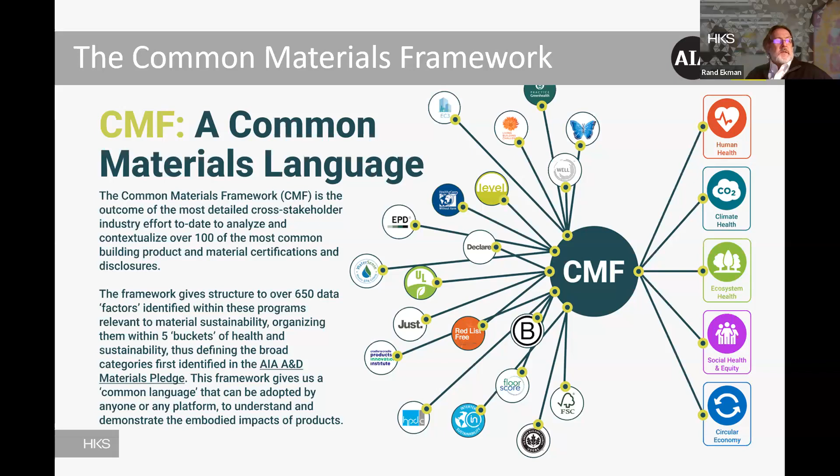All of that information is intended to go through the framework, which is the Common Materials Framework, and then to give actionable information on the five buckets that I've described previously.

We've attached ourselves to a whole host of different organizations. It's really trying to reach around the many different corners and places that our industry has, and position Mindful Materials as a collaboration hub for this information. It's a key part of the organization's work right now.

Again, it's one of the reasons why I want to introduce this on this call, so that you all know that it's there and would potentially take a little time to go out and check out the material, because I think it's going to enable you to do better work in a more actionable way.

The five buckets have subcategories within each bucket. I'm not going to get into the depth of this, but this is the organizing structure for much of the information that is being created in the common language.

And this is the next layer of depth, showing the human health top bucket. There's a host of different issues that get resolved or revealed in the data. In human health, it's substances, VOCs, and then the organization, the company, how it is that the company is addressing human health impacts.

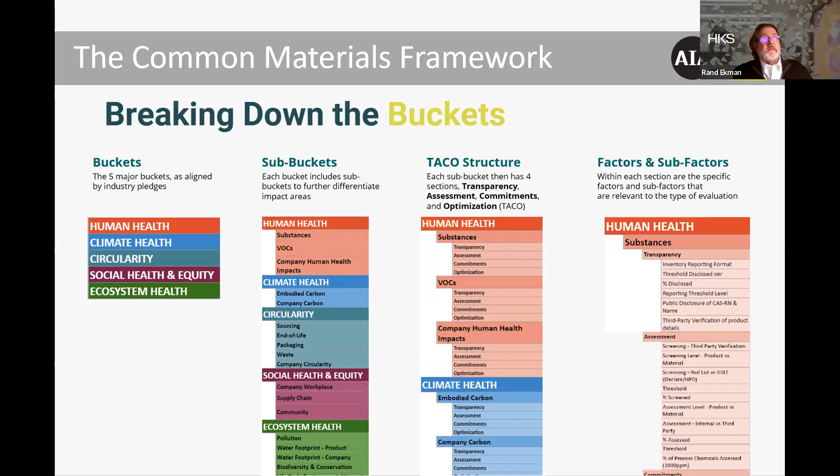Those are focused in on another level of detail, which is around transparency, assessment, commitments, and optimization. And then there's data that flows from that is even more refined around factors and subfactors - what is the actual accomplishment or optimization status of that particular material or product?

So that was hopefully an intro that whet your appetite to go and spend a little time there. I'm going to focus this next piece of slides on a particular project around circular economy, which is why we're here. This is the statement in the pledge to support a circular economy by reusing buildings and materials and by designing for material efficiency, long life, and perpetual cycling.

So this is a project that HKS did a few years ago.

This is the ProMedica headquarters. It's an adaptive reuse of two buildings: one a historic Daniel Burnham designed steam plant with chimneys, and a brutalist, maybe less remarkable, junction building. Both were sited on a park at the Maumee River at the heart of Toledo, Ohio.

This healthcare institute is a not-for-profit with a mission to improve community health and well-being. The design for the headquarters aimed to transform the downtown and reuse the existing buildings. We did a life cycle assessment to understand the delta between building new and reuse, and fortunately had the opportunity to really dig into the reuse for this project.

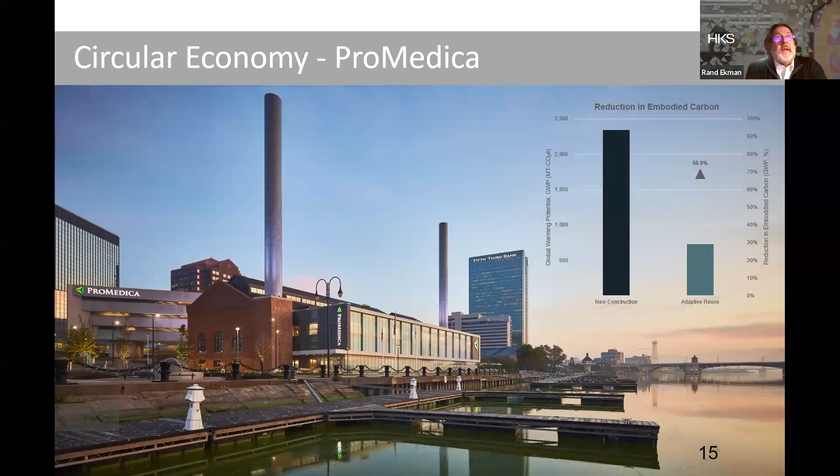One of the things about circular economy is making spaces and places that last, that have longevity. This space has both an interior and exterior function—there's a park with lots of events that has created a vibrant economic place for the community. The urban renewal has affected transit patterns as well as the core economy of that part of the city, and as I said, there was a 70% reduction in the embodied carbon footprint.

That's a project example I wanted to share—I'm particularly proud of that. We don't always get the ability to really dive deep into a reuse. There's a project where we did, and we need more.

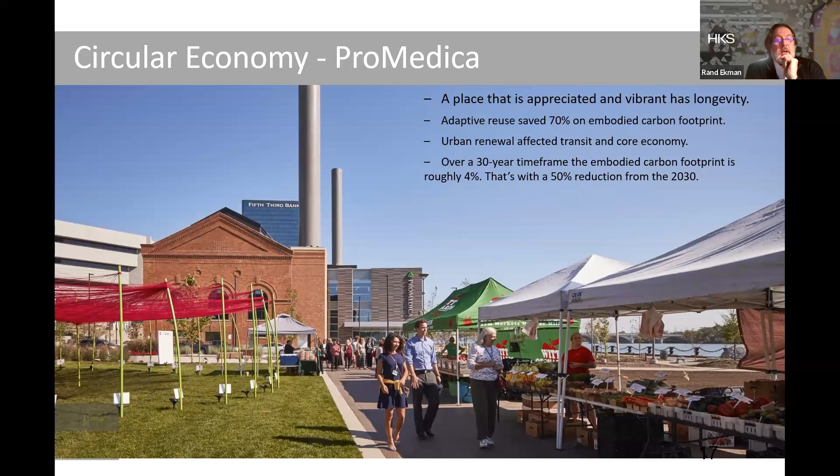Now I'll spend a few minutes talking about what we're focusing on in HKS and how we're framing the notion of circular economy. These graphics and thoughts draw directly from the London plan for guidance on circular economy—if you haven't heard of it, I suggest taking a look. It has useful guiding principles: building in layers, designing out waste, designing for longevity.

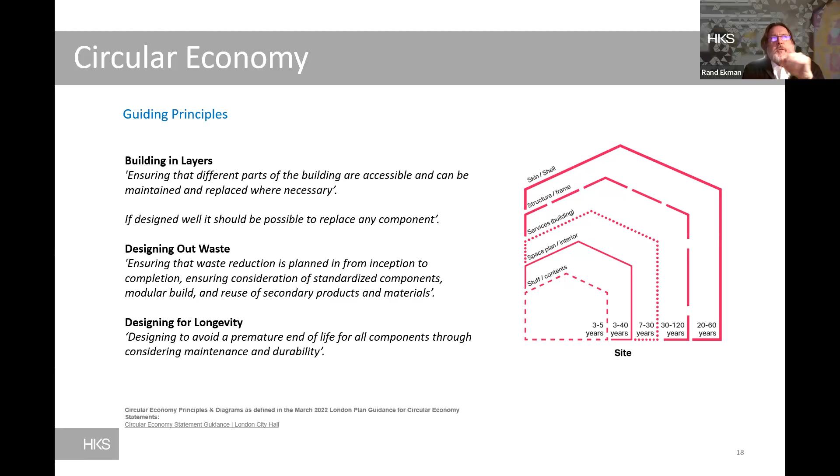I had an interesting experience earlier this week—I was fortunate enough to listen to a presentation by Shigeru Ban. He talked about how buildings he's done that were intended to be temporary are ending up having a very long life, because things considered temporary are being appreciated by users and becoming permanent. That issue of longevity is a really fascinating one.

Designing for adaptability or flexibility, reuse potentially for different program uses, as you saw in the project I just shared—a healthcare office function that was previously a totally different function, a power plant. Designing for disassembly: how we can use more mechanical fastening systems so pieces can be taken apart and reused differently in the future, and using systems, elements, and materials that are easily reused, recycled, and ideally upcycled.

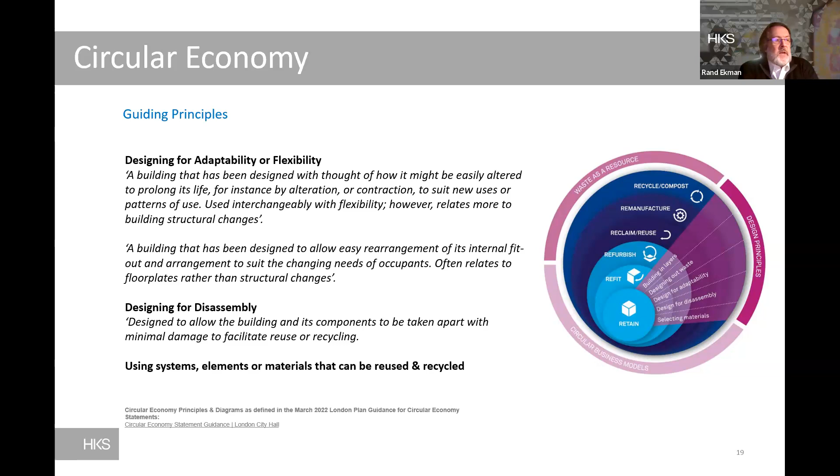I wouldn't do justice to this topic without some editorial thinking. I think this is an area of growth right now with a lot of opportunity, but also some challenges and barriers—we can talk about those at the end. We have information about how to design towards circular economy, but it's not always packaged in a tangible way, and design principles aren't always built into the workflow we'd hope. Specific examples exist, as I've shared, but it's still somewhat of a niche topic—there's a new building mentality that permeates the industry.

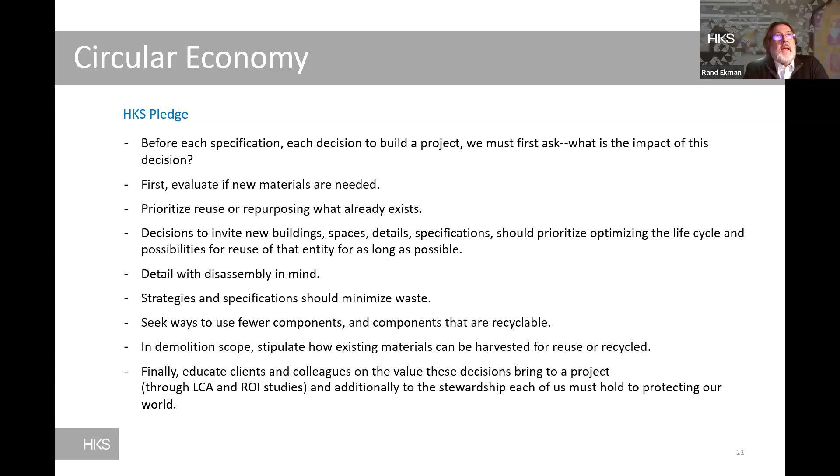And I think that is my last slide. Is that right? Oh, one more.

Big statement: it's time for circularity with purpose and vision. It's going to take work. It's going to take commitment. It's going to take signing on to the pledge that I shared at the beginning of this. I hope this was a bit inspiring, and we'll all go there. Thank you very much. Now we can go to the next slide.

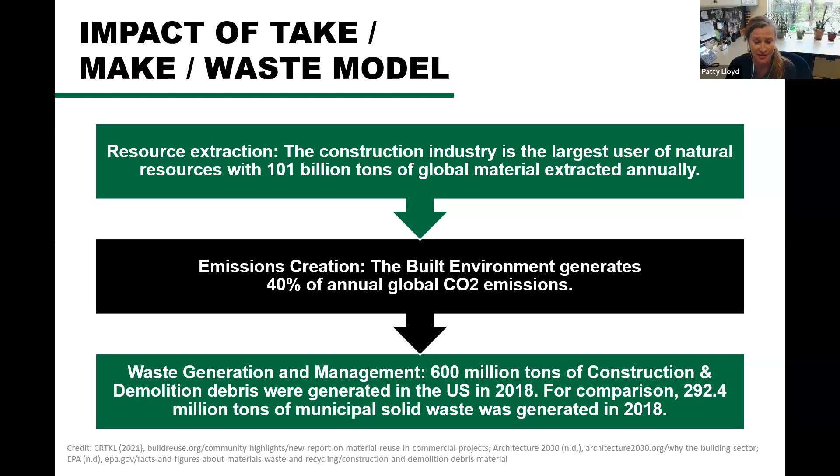So the construction waste stream. An FCRBE study, done in Europe, found that only 1% of building items were reused. There is economic loss and high environmental cost to this.

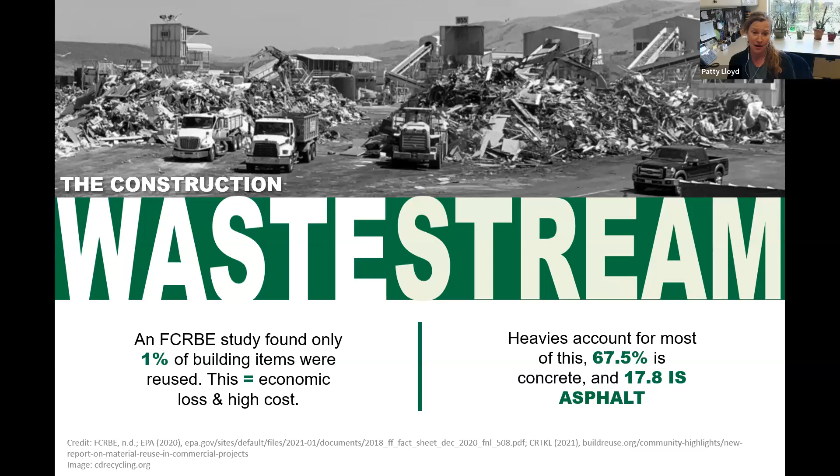Construction growth projections are high as we continue to build to accommodate a growing population. Between now and 2060, across the world, the equivalent of the city of Paris will be built every week. There's also a US comparison with the city of New York. Over the next 40 years, total building stock is estimated to double, and nearly a third of our present building stock is going to come down through that process.

By 2050, we'll consume 3 planets worth of resources. That doesn't seem like a feasible number—we've only got 1 planet. I don't think we can recycle our way out of this. So how can we reuse and salvage existing materials to do that?

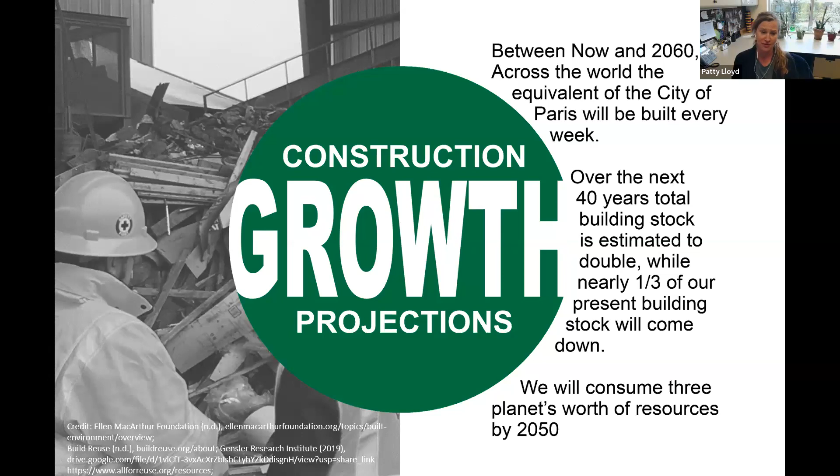So we're really in a linear model right now. We need to go to a circular model—that's why you hear the word circularity. Often when you say circularity, people say to me, 'I recycle.' Well, that's great, it's just not about recycling, right? And you can see a beautiful circular model here at the bottom.

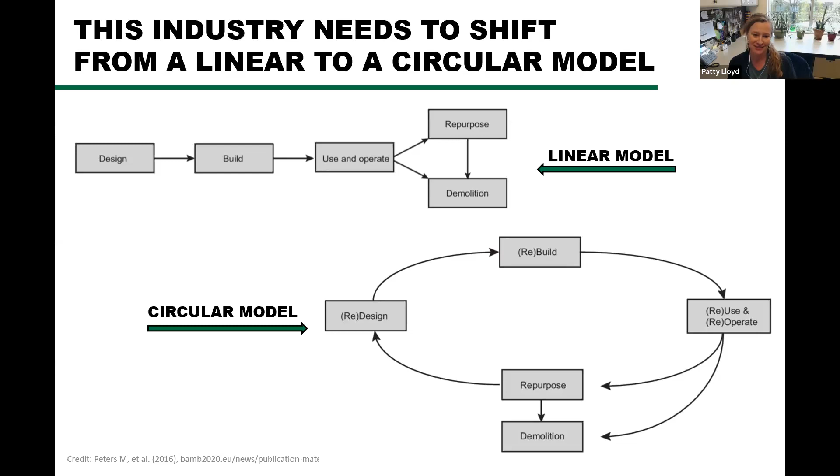So there's triple bottom line opportunity for commercial deconstruction. I'm not going to talk about deconstruction a lot because Ann's really got that covered, but we've got environmental, economic, and social. As someone said to me recently, deconstruction and salvage truly hit all 3 legs of the stool of the triple bottom line.

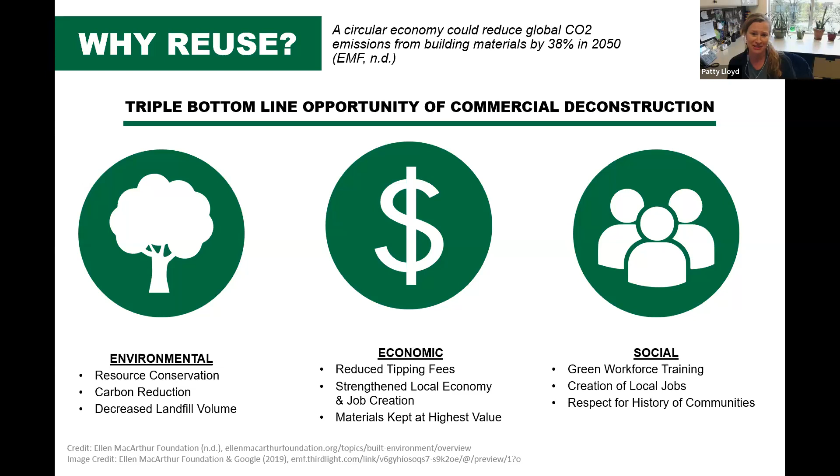This was put together from All for Reuse, which you should check out their website. This slide focuses on the high churn of tenant interior projects—these projects turn over really fast. What that means is you often have a lot of really usable materials going to landfill or recycling that have hardly been used. When a ceiling tile in a commercial interior project gets replaced every 3 years, it's essentially not used, it's brand new. How can you design to keep that in place, or donate it, or put it to a manufacturer take-back program?

This slide really shares some great points: demolition waste from commercial renovations is over 20% of the US construction and demolition waste stream. That's a pretty big number when you're talking not whole buildings, but really interiors.

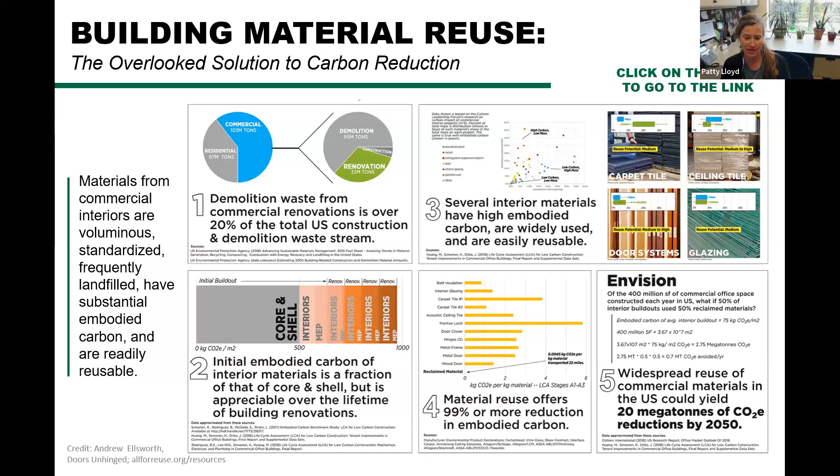Next slide, please. There's a huge opportunity for surplus, really kind of a hidden story of the industry that people don't talk about. This is your attic stock, the extras when you have to order a high volume to get a price break. So it's another feedstock into the materials reuse stream.

It's not the same thing as salvage materials, purchased and never used. There's materials data available, and it's new in box. The San Francisco Department of the Environment did a great study on this that you can access online to find out more, but they had some great findings.

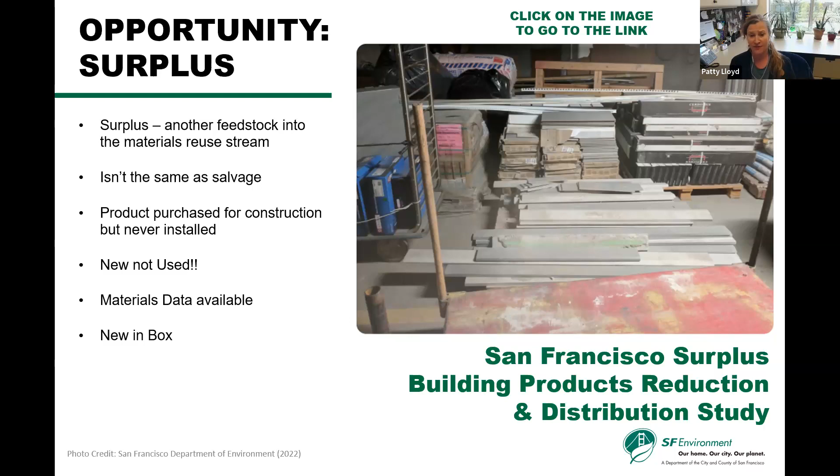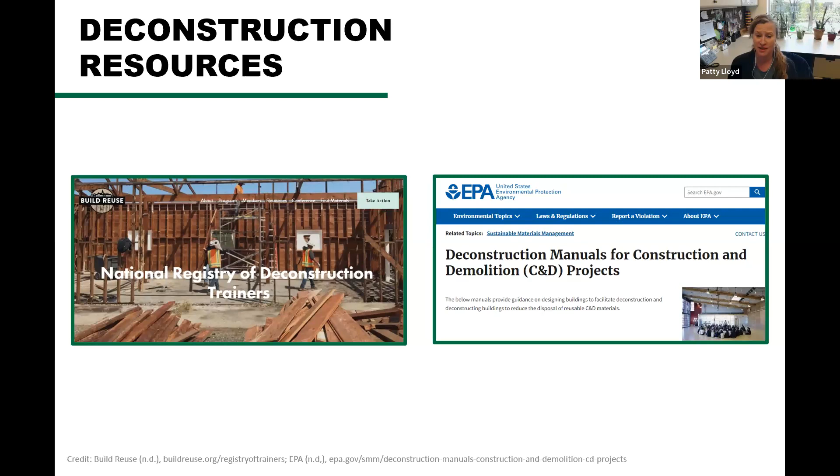Code language is supporting reuse in new construction. Washington State and Oregon have both implemented code language to facilitate the reuse of building materials, and this is a big deal. I believe more and more cities are going to start to pick up language like this.

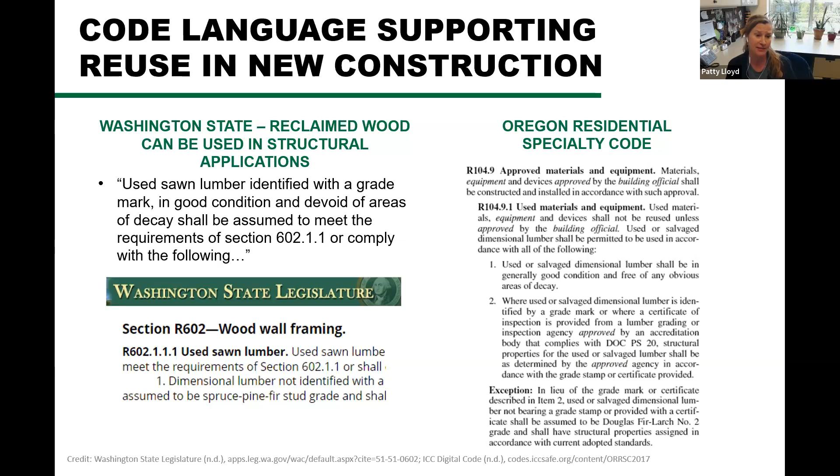Salvage assessments are really, really important. This is something where if it's coming from the design side, or the client's asking for it to be done, that can be really meaningful. You can't manage it if you don't measure it, so if you don't inventory what's in a site, how do you know what to salvage or recover?

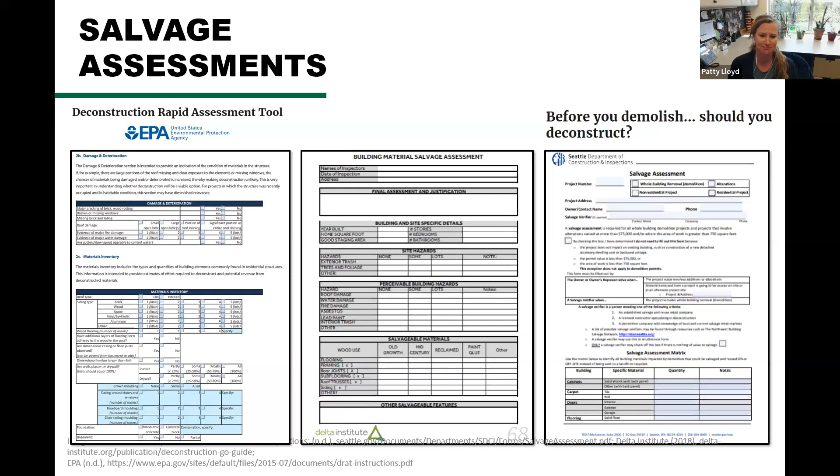Stop Waste has a deconstruction specification that can be used. This is an excellent tool that anybody can download.

Material rescue and reuse epitomizes climate action for the building industry. It honors the embodied carbon and upends the prevailing linear take-make-waste pattern, and that is the truth of it. When you're salvaging, you're respecting those harvested materials, you're respecting all the inputs put in to manufacture it the first time. There are a growing number of cities and states implementing construction and demolition debris laws, in addition to deconstruction ordinances.

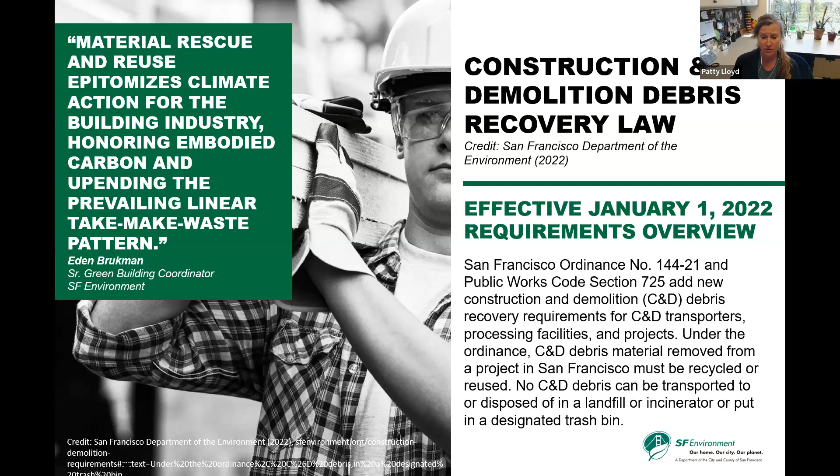Next slide, please. Yeah, I thought I had a slide about deconstruction ordinances. More and more cities are having deconstruction ordinances, and this is a great way they're achieving their climate action plans or coming to their zero goals.

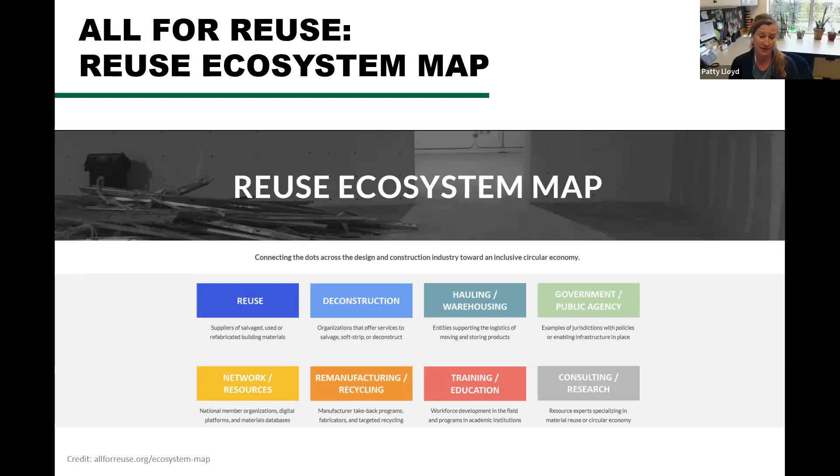The All for Reuse website has a reuse ecosystem map. You can go in and it's directed by state, and there's a lot of different things you can search for to try to find resources in your area. I thought I knew what was going on in our area, and I actually found a couple things I was not aware of. So it's a great resource to check.

Next slide, please. There's a lot of material exchange platforms coming out. We need them all, we need all of these different niches in this space to move materials. One of the biggest issues, and I think Rand alluded to this, is the logistics. Like, okay, if Rand specifies some reused materials, it's quite some time before us as the contractor get that. What happens to those materials in the interim?

Who stores them? Where do they go? Furthermore, when we're pulling materials off of jobs, how are we moving them? I go to Anne's organization quite a bit, but these materials exchanges are becoming an extremely powerful tool to facilitate materials exchange.

So there's challenges. Schedules and contracts don't value deconstruction and reuse, and they don't reflect the added time or labor that needs to happen sometimes. There's not enough stability to make sure the materials are there when needed. You've got to have some out of the box thinking. If you're specifying materials before the contractor is hired, maybe the owner gets those materials and stores them somewhere. I don't know, but these are things we need to be thinking about.

There's inundation of certain commodities, commercial deconstruction and salvage and reuse is talking in large quantities. And most of the places that are out there that are reuse stores don't have the storage space to handle that. So how do we move that? Cheap landfill costs in parts of the country. Somebody said to me, but don't you save money on tipping fees? Not when the landfill costs are super cheap.

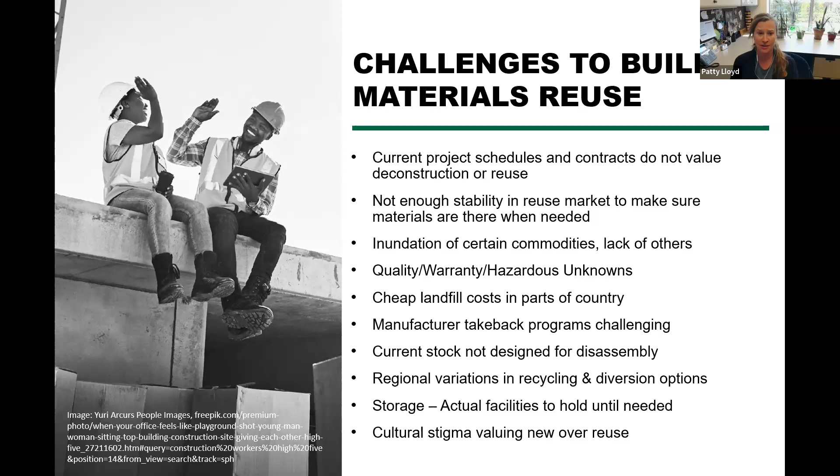Collaboration needs to happen from everybody at the table to make this work. There's no one party that is going to be the one to facilitate and make this happen. It's an all hands on deck type of situation.

For reuse people, the Inflation Reduction Act has quite a bit of money out there for programs to reduce embodied greenhouse gas emissions associated with construction materials and products. So a lot of organizations are filling out this RFI to try to get some of this money to reuse. If you are a practitioner in that field, definitely check this out.

If you have questions or comments, let me know. This slide deck, the original version of it is on the Build Reuse website, and I do believe that Illinois Green is going to be sharing them. With all that information, I'm going to turn it over to Anne Nicklin to finish us off.

Thank you. Okay, and I think I'm on. I lost internet for a moment there, so hopefully I'm here. Thank you so much, Patty, and thank you, Rand, before Patty. Next slide, please. I'm going to go ahead and be kind of speedy about all of this because we're low on time.

So I'm Anne Nicklin. I'm the Director of Workforce Training and Deconstruction Services here at the Rebuilding Exchange. If you can go 2 slides ahead, Twyla.

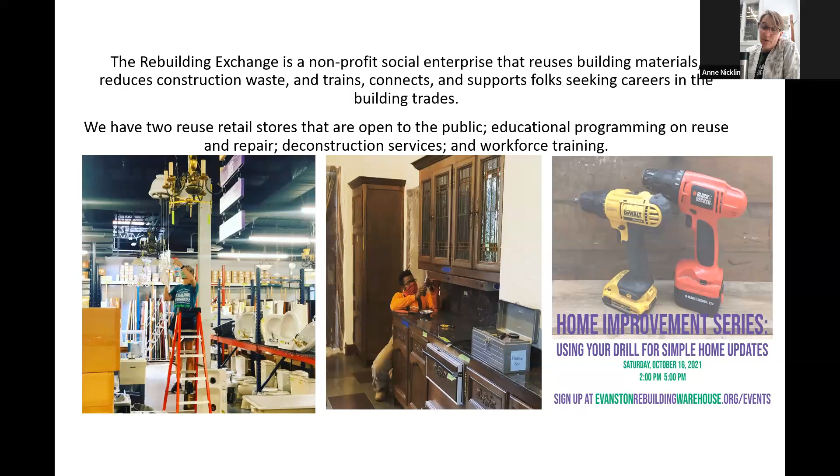A little bit about what we've got. Some of it is the beautiful reuse that everybody pays attention to, the stained glass. Some of it is just honestly more mundane. Microwaves, appliances, dishwashers. Those are the things that are actually our highest sales point in Evanston. A lot of lumber. People love the big lumber.

They don't buy it as often, but we do get a lot of that big lumber, talking about old growth. I think there's room here for a much larger conversation about carbon. It would actually be really interesting to have a salon discussion about the IPCC report that came out and talk about embodied carbon, because both Patty and Rand have mentioned it. It's a huge deal, particularly when we're talking about wood. It really is an enormous deal, and is the climate change that we can prevent right now. But with lumber, we have old growth, and then we have things like light shades, right? Simple stuff.

A little bit about deconstruction. Patty talked about it quite extensively. The deconstruction that we engage in can happen at all scales. Sometimes it's taking down a whole building, other times it's taking down all the interiors. So we're really working with whatever the opportunity is.

For us, it's part of a social enterprise. So we are charging people for the deconstruction services because frankly, you get a service for it. Then those materials are donated to us, so there is a savings on tip fees. But at the end of the day, it's a different deliverable. I hesitate to get into those comparisons, right, those Best Buy comparisons of like, show us the flyer that has it cheaper. We're never going to win on deconstruction being cheaper because it's a different deliverable. You get a different good. You're paying for people rather than tonnage. You're paying for time. You're getting actual goods out of it instead of crushed up materials.

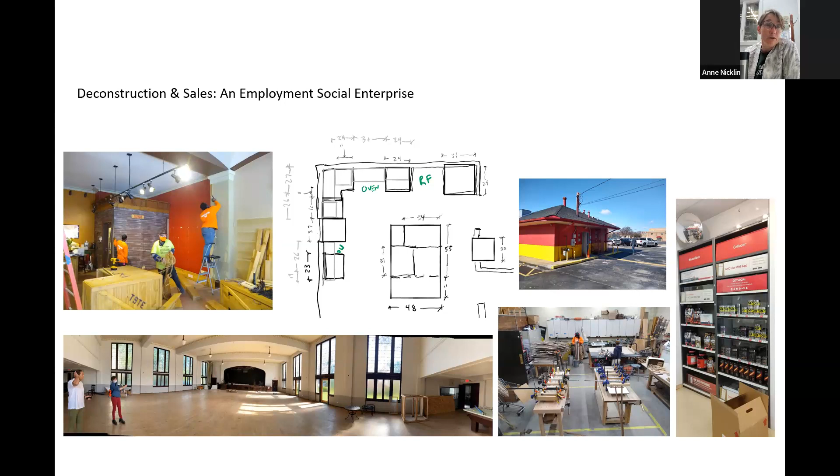This is our decon crew. We have a lot of fun, in all honesty.

Educational workshops, talking a little bit about that. If anybody's in the Logan Square neighborhood this weekend, we've got our education folks out there recruiting volunteers in Logan Square. And there's another one coming up, Young Evanston Artists. You can see that on the right-hand side there, a lot of string art. If you like to watch small children hammer things, that's the place for you.

But a lot of this is about how do we change the world, right? When people talk about recycling, one of the great things the recycling folks did is they went into kindergarten classes and started talking to kindergartners about recycling and how important it was. I remember going home and yelling at my dad, saying why aren't we recycling? Why aren't we doing this? We have to put a recycling bin out. You make children your little advocates. And so we are doing that as well.

We have a woodshop class for middle schoolers, partly so that we can share the skills, but also so that we can really get out there and build the widespread advocacy that we need that is going to reuse things, that's going to keep things in current use.

A little bit about workforce training, and I know we're tight on time, so I'm going to go ahead to some of my case studies here. If you want to know more about our transitional employment, I can talk about it until the cows come home. We have transitional employment.

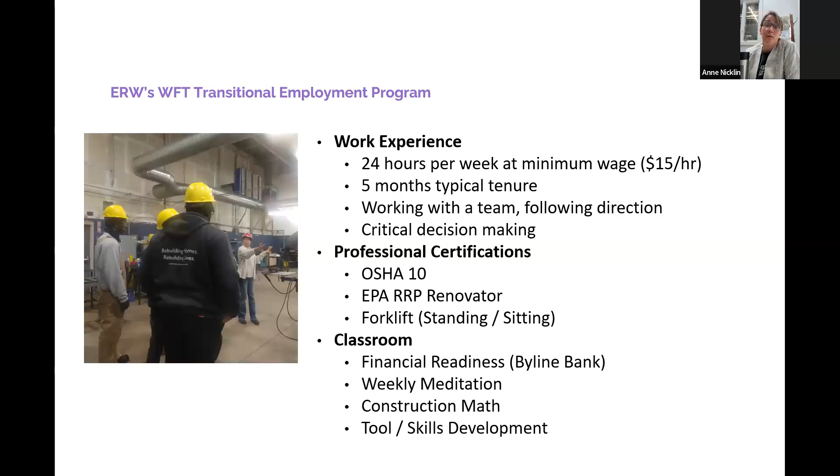We're part of a Snap to Success employment and training program, and we also just recently launched a pre-apprenticeship program last year. We served 70 people last year, and we're going to serve another 70 in pre-apprenticeship this year. There is a huge change going on right now in the state of Illinois, as well as in the federal situation, to really radically change the representation of people of color and women in the construction trades in the state. And it's happening, and it's quite cool, and we're part of that. So reuse is being used as a catalyst to help move this forward.

A little bit about our theory of change. I'm going to skip that, too texty, but once you get the slides, take a look. We're trying to change the world in a lot of different ways here.

So these are three case studies of different materials that we've brought through that I think are interesting from both a design and a construction perspective.

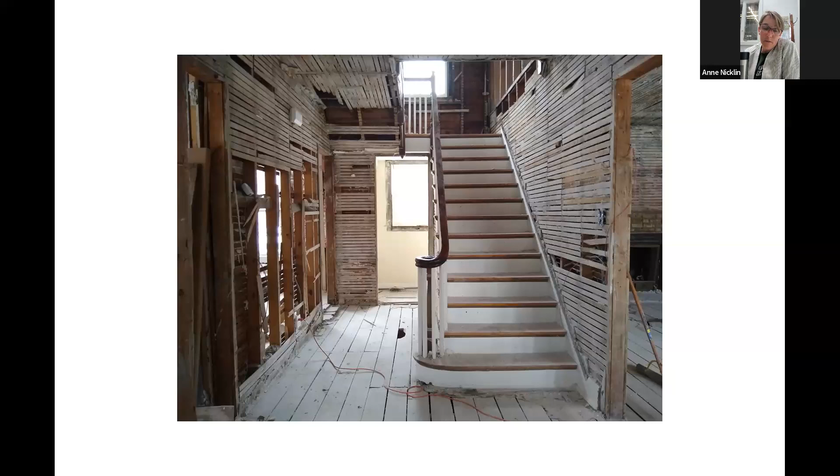So this is a house that was owned by the YWCA here in Evanston. They had used it as administrative offices and at one time as dorms, but finally they had raised an enormous amount of money to do a big capital project and bring everything together under a single roof.

Part of that project was taking this house down. Originally they had hoped to deconstruct the entire thing. They ultimately got an influx of money and a weird combination of schedule things, so they couldn't deconstruct the entire building - they had to push their schedule forward too quickly. But it was one of those odd things where we had done all of the plaster, which is the first step on a decon of a building that's pre-1950, taking out all the plaster and frequently the lath behind it. So we'd done all the really dusty, disgusting, terrible work. We'd also gotten the wood floors, which are nice, and a lot of the finishes, but we hadn't gotten into the structural lumber, which is actually where the true value of a residential home is.

But we had a ton of wooden lath. So we had a project with a local bakery, Hewn, opened by a woman who used to be a preservationist. She named it Hewn because she had such a crush on an adze she worked with to make hand cut lath when she worked in Minnesota. So this is kind of a full circle thing, opening up a new branch of her bakery. It's an all whole grain bakery. It's really neat, it's in Evanston, it's beautiful.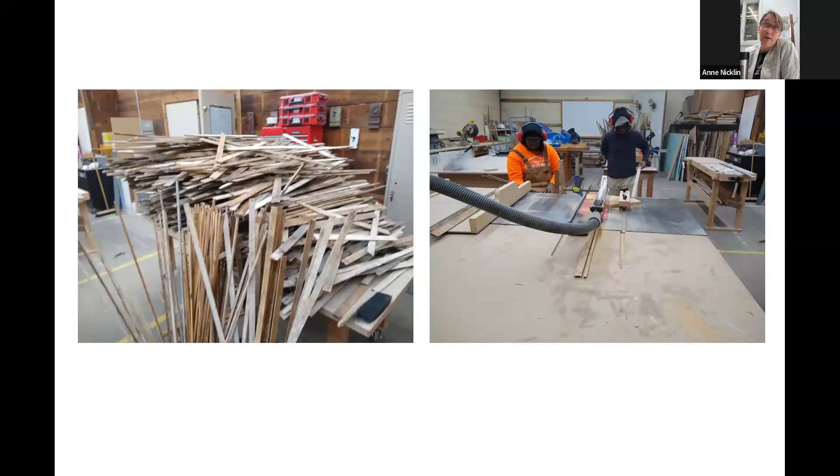And they wanted to incorporate reclaimed materials - they'd always had reclaimed materials be a big part of what they did. We came up with this cool project to process all this lath and turn it into the counter skirting for their new bakery. So we laminated the lath together, ripped it down, and created a little fingerboard jig, which was my fun little chance to do that, and did this whole project. This was actually March of 2020 - basically everything shut down and we lost all of our deconstruction projects, and Hewn Bakery came through with this project and we were able to keep running our training program by doing this.

Oh, I didn't even realize that was a little video - blew up video. Good stuff.

People see that a lot, right? They see the beautiful restaurant where you get instant patina, you get instant authenticity by having reclaimed materials. But I emphasize that because, honestly, all of us can pull off anything. This is one of those great webinars where we're all builders - we all know that everything we encounter was built by people, and that means we can all rebuild it. We can take it all down, we can reconstruct it, we can build it again. I very much like Brand's inspiring idea of - this is our world, we can make it better. With something like Hewn Bakery, it seems small, but at the end of the day we can just make whatever decisions we want about design and construction. We have the folks here to make that work, so if you have an idea, we can probably make it happen.

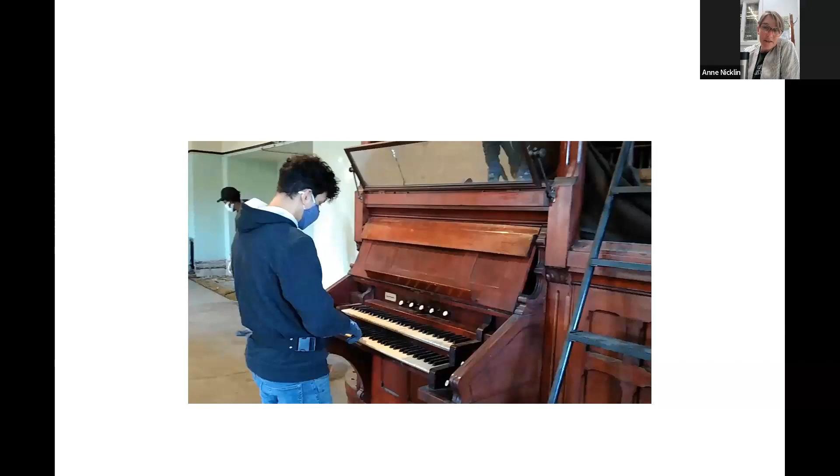In this situation, we were taking out everything that we possibly could. Some of that was really simple, like we took the pool table, but some of it was more interesting, like the organs - there were 3 organs that came out. Now we've got Diego playing the organ.

There's a better video on the next one, so let's go to the next slide. I didn't realize how many videos I had in here. Loading up in front. Next slide, please. All right, if you hit the button it's going to start a movie on the right-hand side. Is there a good movie on the right-hand side slide? That was the one I was going to go for.

But it was a really cool project. We were doing this actually during the snow. This project kept going through, I think, December of 2020. But if somebody makes the time and makes the opportunity available, we really can do just about anything, right? And all of these projects, there's somebody who wants to reuse these materials. Some of them are very straightforward. Wood floors are very, very easy. Decorative windows are a little bit more challenging, but there's always a buyer for it.

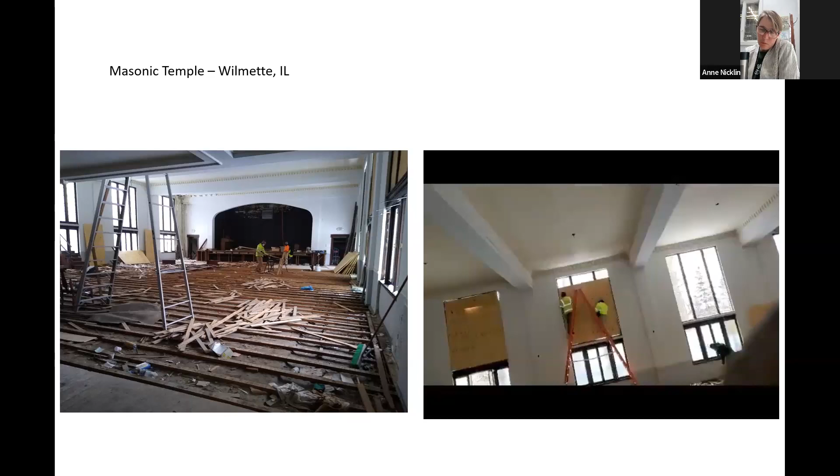Next slide, please. All right, and then finally, this is our warehouse. This is actually the reuse that I'm most proud of. I've been in reuse for a really long time, and I think that we can absolutely reuse just about everything, and I particularly love the ugly stuff.

Next slide. So we moved into a new warehouse. We signed the lease in February 2020, moving from 13,000 square feet on Dempster to 26,000 square feet just around the corner on Hartrey Avenue. And so we signed the lease. It was a building that had been, well, the whole building is a huge old Montgomery Ward transfer station.

But what happened then is we were renting 26,000 square feet that had previously been used to re-roll tape. So these people had bought off-good tape from places like 3M and those kind of manufacturers, and then they would re-roll it into dollar store tape. They'd been here for 40 years, nothing had been touched, carpet everywhere, and then ceiling tile everywhere, fiberglass 2x4 ceiling tile everywhere. So we took it all, and I didn't quite know what was going to happen.

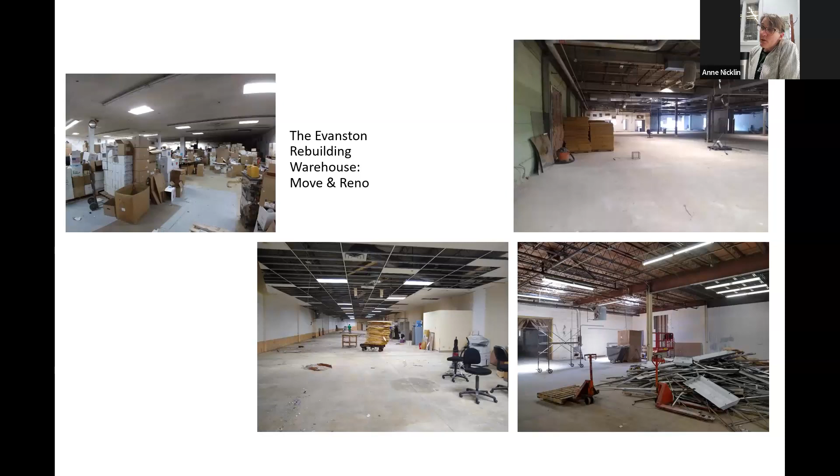So we took that 26,000 square feet of ceiling tile, which was about 15 pallets of ceiling tile. We would have gone through at least 3 dumpsters. Instead, we brushed it all off and we changed the way that we were specifying our drywall walls, our chipboard walls, to 24 inches on center rather than 16 inches on center. We had to change the gauge of the steel studs to be a little bit thicker, but not much.

And then we stuffed all of our walls with our insulation. So rather than paying for the cost of new insulation, we paid for labor to cut and install all of those 2x4 panels and insulate all of our walls, which has frankly been kind of amazing because we probably wouldn't have paid for insulation otherwise. And to pay for the cost of cutting it down to size, I think in total it was like maybe $3,500.

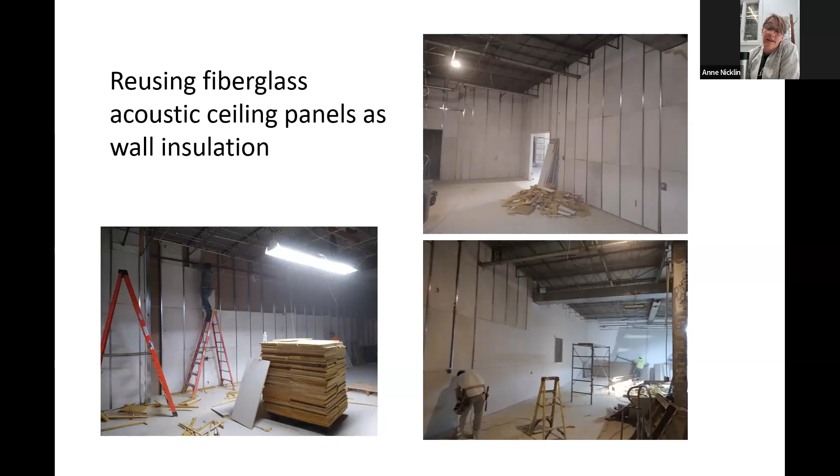It was far less than we would have paid for insulation. So this is totally invisible now—you can't see it, but it's been astonishing. That's my favorite reuse ever, and I hope we can continue to do quite a bit more of that. I love seeing Patty doing it on a project, right in the same size, right on the same site. This is where the opportunities lie. Next slide, please. All right, that's me. Hopefully we have enough time left for Q&A—I tried to go very quickly with lots and lots of slides.